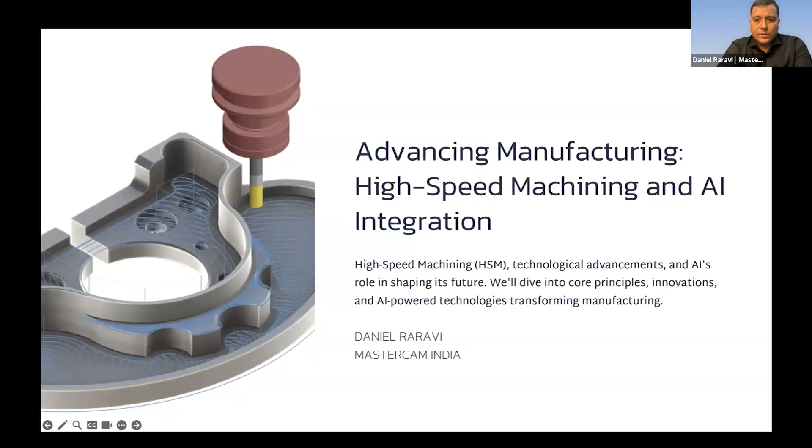thermal stability while machining. All of these are some of the factors because of which we are discussing this topic called high-speed machining today. The evolution of this starts with the core principles and followed by the innovations and where this technology is going to take us forward in the future. So let me just start off.

Obviously, they say necessity is the mother of invention, and therefore HSM also is a process that has come about because of the rising demand for profitability. I think when Mr. Menon spoke, he spoke about one very important characteristic called the high material removal rate. Now, why high material removal rate?

So if I were to equate it with a human being, let's say, for example, if I'm walking from my home to my workplace, and it takes me at a very decent walking pace about 15 minutes. What is the need for me to reach my workplace in less than 3 minutes or in less than 5 minutes? That is the question.

And the answer for that high material removal rate, or for something that we need to reduce the time factor in, is profitability. I think at the end of the day, it all equates to the RPM that he spoke about, rupee per minute. And that is a very essential takeaway for all of us here today, because ultimately all these technologies, all these processes are a factor of that single unit, which is cost.

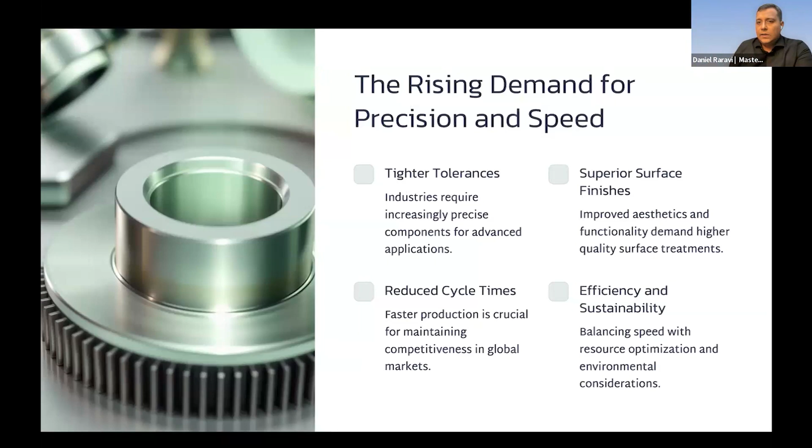So based on this, the amount of time your cutting tool is in contact with the material is what defines high efficiency and high speed machining. And in order to address these challenges, there are certain core principles of high speed machining that we need to consider. Faster spindle speeds, again, a factor of cutting speed, as covered by Mr. Menon earlier. These faster spindle speeds allow for quicker material removal.

So there's something called a combination of the spindle speed and the feed rate. In cutting tool theory, there's a concept called radial chip thinning. What radial chip thinning does is when you introduce a cutting tool into a material, it starts with a larger chunk when one tooth engages with the material as it starts shearing this material, and then when it comes out, you have a thicker edge and a thinner end.

And some of the earlier proponents of high-speed machining and these manufacturing scientists, they said that this is not a great quality. I think what we should try and do is maintain uniform chip thickness. And that's how the radial chip thinning concept came in.

They started increasing feeds to make sure that the chip thickness starts becoming uniform. That presented another challenge, because you could achieve that when you were doing a straight cut. But what happens when you introduce complex shapes, such as these corners here, and these sudden changes in the toolpath direction? What happens here? That becomes a challenge.

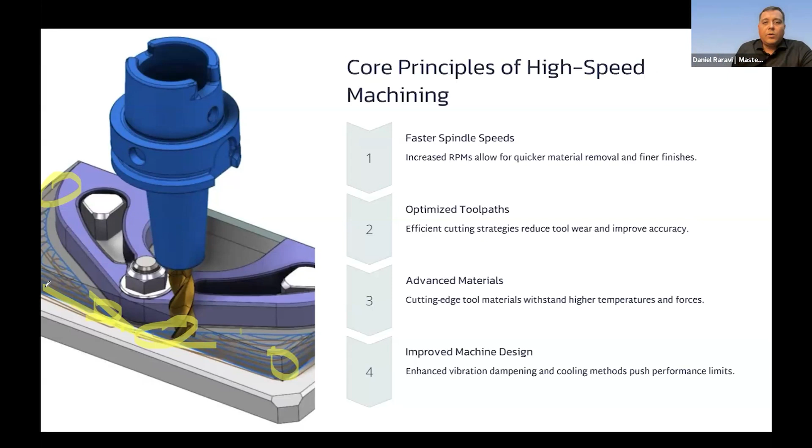And therefore, along with the CNC machine tool, you came up with the work holding setup, rigidity of the work holding setup, then the cooling media, whether it was cutting oils, compressed air, or a host of other cooling media. And alongside of that, the stability of your spindle, the runout of your spindle, the bearings of the spindle, to make sure that when you're performing such high speed and high feed cutting, the spindle maintenance is absolutely reduced, which was covered by Mr. Magesh when he spoke about reliability of machine tools. So all these factors became the core principles of high speed machining.

And then come the innovations. Multi-fluted carbide tools, specialized coatings, precision inserts, shrink fit technology, which was introduced some 20, 30 years back, moving away from collet-based holding in order to support high-speed machining. Then high-speed spindles with ceramic bearings, the hybrid bearing systems of the axes, the X and Y travel beds, and thermal stabilization introduced into the machine tool design at the casting level itself.

Machine tool companies started getting involved in FEA and FEM to understand how specific loads, when transferred onto the spindle, can be dissipated. All of that came into the innovations in machine tools. From the CAM software point of view, there have been a number of technologies that are part of the high-speed machining process. One of the technologies is Dynamic Motion technology, which is patented by Mastercam. Similarly, other CAM software have similar strategies towards high-speed machining, and each of them looks at one or two different scenarios.

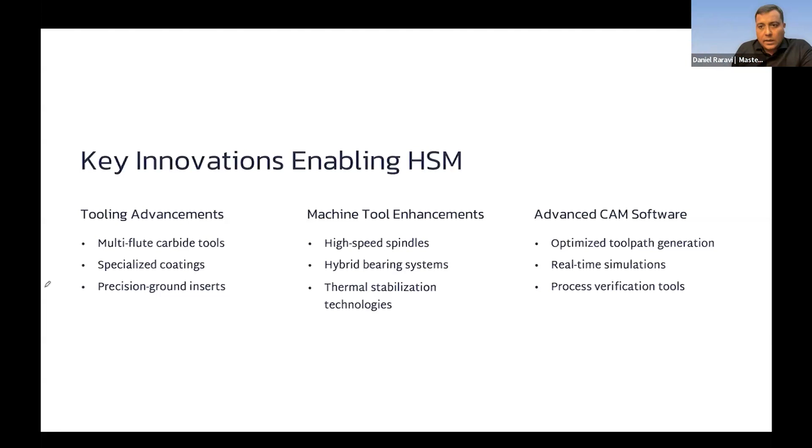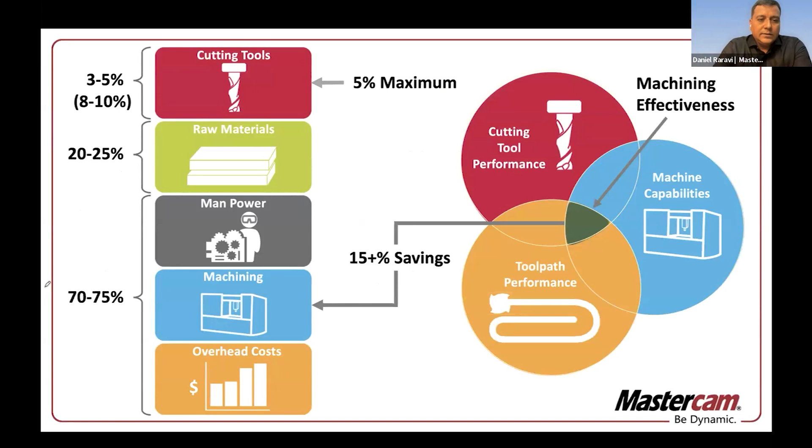When you specifically look at solid carbides, the proven method is to have a low AE, which is step over, about 0.07 to 0.15 of your cutting tool diameter. That is your tool engagement. And your depth of cut is up to two or three times the tool diameter. The feed rates can be a function of the material and the machine tool limits. When all of these are put into the CAM software, the CAM software's brilliance until the current generation has been the speed at which it computes these toolpaths. After all of these technologies are put in place, these are the areas of machining in which you could use these optimized strategies to reduce your costs.

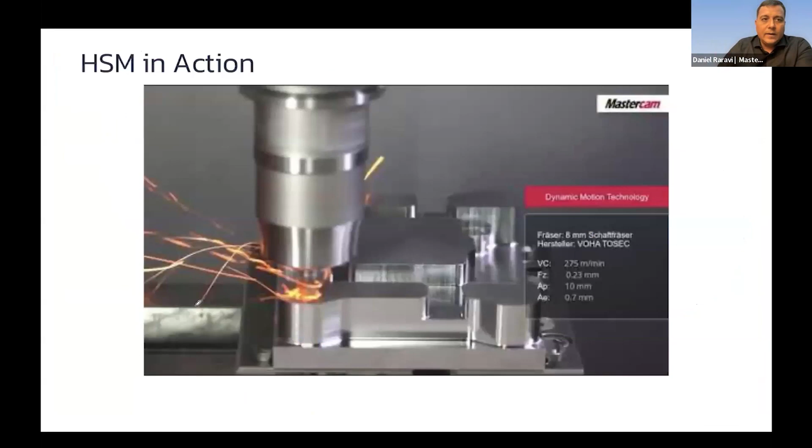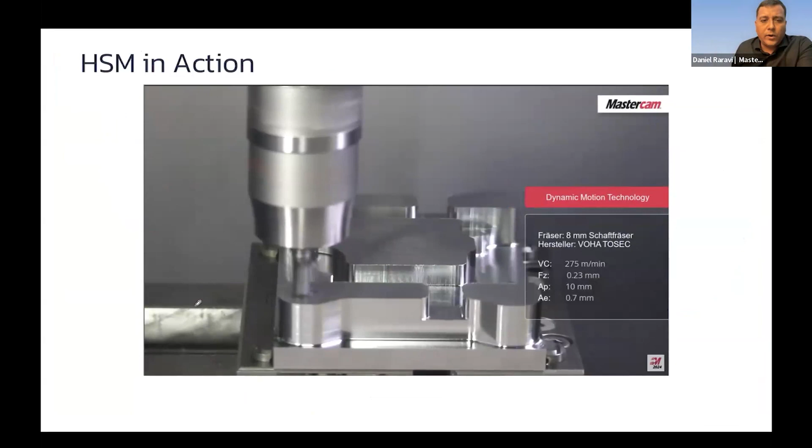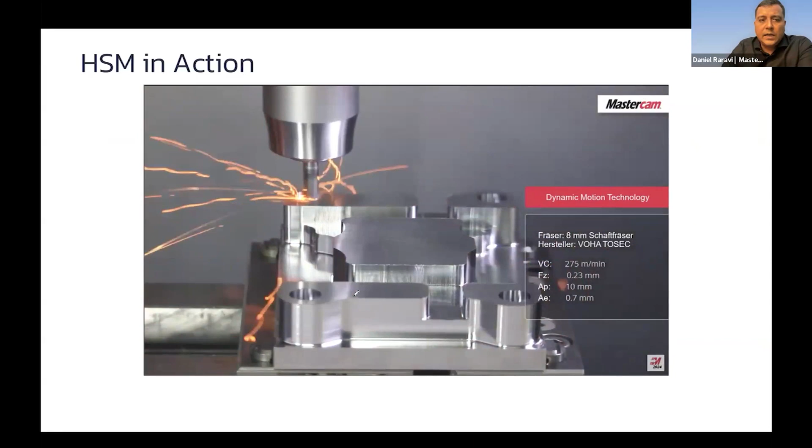This is until now. Let's see a video here. I put this video up for one important aspect. When you start seeing these fireworks here, at each of these holes, that's optimal high-speed machining in action, because all the heat being produced is being carried away by the chips. Mr. Menon mentioned that the chips are a waste byproduct. When you do that, you make sure the work is not hardened and your tool life increases. Because the chips are going to get thrown away anyway, all the heat is transferred to them.

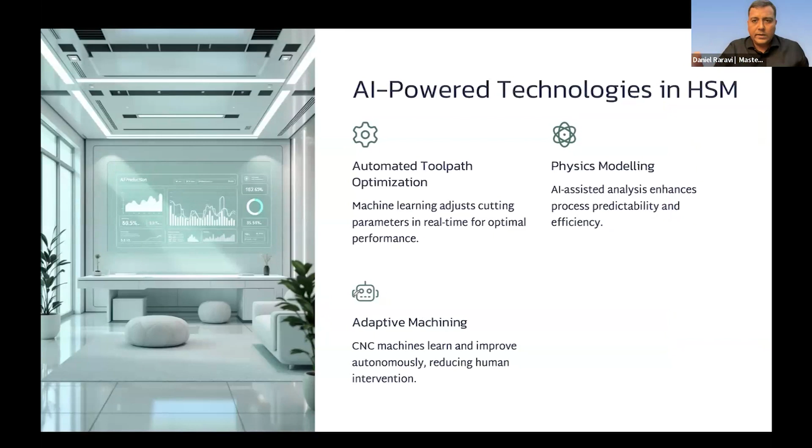The way to embrace the future of machining and optimize high-speed machining would be, again, continuous innovation. Training is more important, because technologies evolve. I started speaking about high-speed machining in 2003 and 2004, when we talked about how companies need to adopt it. That's a technology of the past. It needs to evolve beyond that now. Training is one of the key components in advanced manufacturing that will help companies collaborate with partners across the machine tool, the cutting tool, the cooling media, the work holding devices. All of these people need to work harmoniously, and that will bring about sustainable practices going forward.